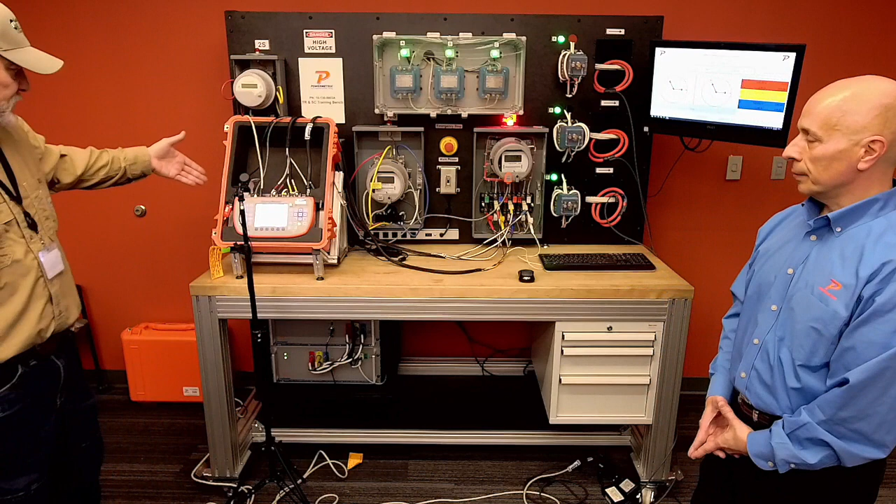Okay, so here's the 3 series right here. You'll notice, here's the dongle that allows us to communicate, and this is the window into PRM here. Notice we've added a little extension accessory right here, because the more we got thinking about it, you know how we tend to be the curve busters or the buzz kills, the field guys.

So this is all standard, everything's a standard connection. Stephen's going to, from his laptop over here, actually perform the test and everything. He'll be sitting over here at a table.

I'm not going to touch anything. I'll keep my hands in view so you know I'm not pulling any tricks. Stephen's going to start operating things over here. But we're going to talk about the screens a little bit over here. So I guess we'll head over here, right Steve?

Right, and we'll just continue, Jared, if you want to go to the next slide. Here's what we had from our phase 1 of PRM: the fact that this can be operated from 100 feet as well as in high EMF environments. It's now in a SQL Express database. We're Windows 10 and then in future 11 compliant. And these have been maintained now from phase 1.

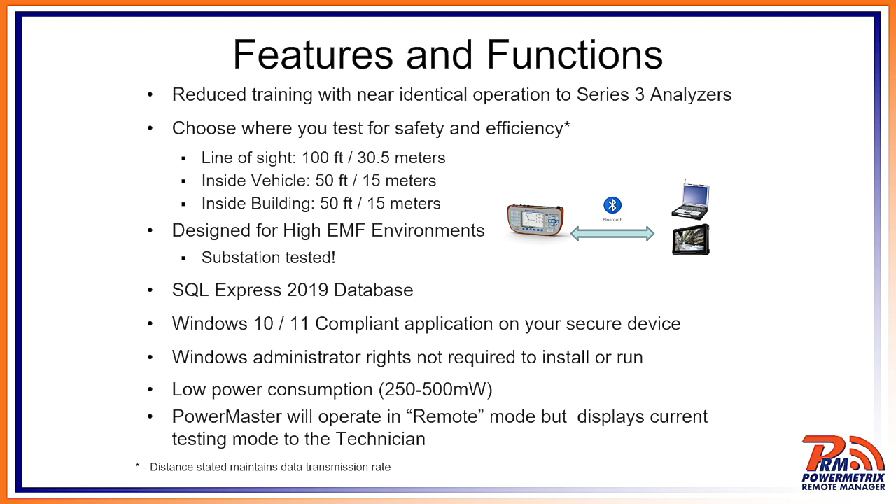And now into phase 2, what you'll be seeing today is we've updated the user interface. We have now real-time display of hot screen data.

So now right from PRM you can see hot screen data. We have the data being transferred in real time. We have a revised summary screen that you can save, as well as more data enhancements from a SQL database perspective, as well as the enhanced data selection capability.

And then, as John just said, the USB extender, that's part of the kit in addition to the Bluetooth dongle for our wireless communication. So with that, we can head right over to our tablet.

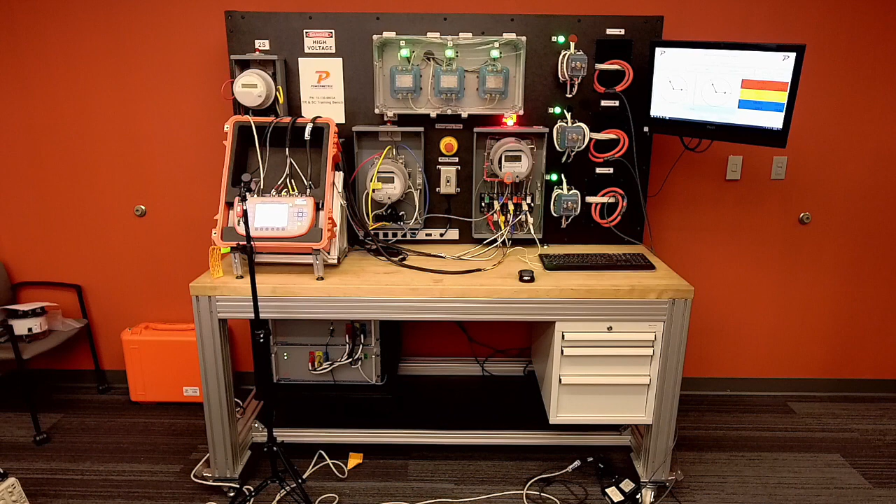So what I'm going to do right now is connect our analyzer, and I'll press the Connect Analyzer button. It will show the serial number of the 3 series that is there that John just showed us that's connected to the bench. So once it's connected, you'll notice the rest of these selections are now available for your use.

And one of the things that John likes to do is make sure that the test setup is correct and there aren't any pre-test kinds of signals or data that you could tell.

So as I mentioned before, we can now do our hot screen analysis directly from PRM in real time. Sorry to interrupt, Stephen, but when you were doing the Connect Analyzer, I noticed the number comes up, and that's the serial number off of the device, right?

So we know that you are married with this, so that we know which one we're controlling, and you can't have problems talking to different ones. That's correct. So you have to log in with that serial number of that particular device, so we make sure they're married together. We don't get any stray stuff, and there's no confusion.

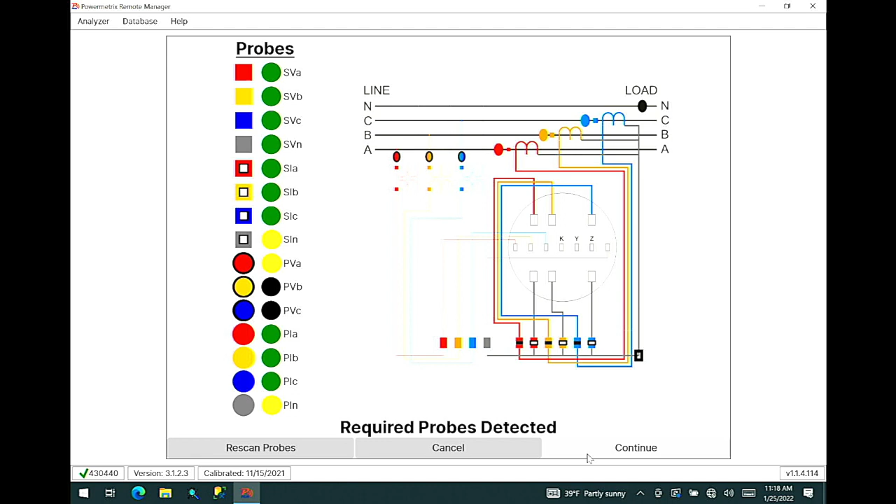So I'm going to run to the hot screen, or select the hot screen capability. It's going to do what we always do to make sure you have the proper probes connected. Probes were detected.

And now we're going to continue, where you'll see our vector diagram along with our ability — we have what looks like good vectors here — our ability to select primary and secondary current. And John, you can continue why that's important.

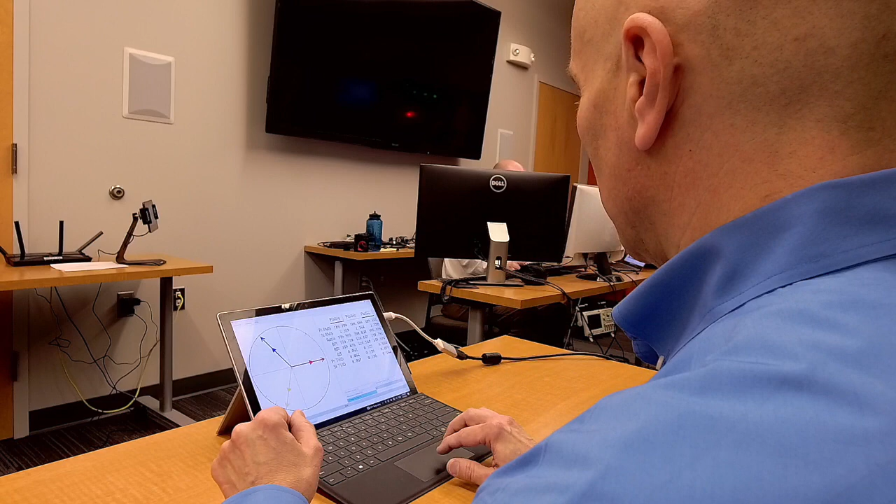So here you can see he has the selection over here on the primary. You have primary on this side and secondary on this side. So the primary over here, if Stephen clicks on there and drops it down, you can see I can take a look at my primary current or my secondary voltage here. If I come over here, then I can see my secondary current.

So what do we always talk about when we're doing these tests? We always talk about pre-test. I want to look at my primary versus my secondary current. And we have that capability now with the PRM, because you can see up here at the top that it changes from secondary current to primary current. It should, if you go to primary, right? Yes, let me just go down here.

Do you want primary? Yeah, let's go primary. See, so now we changed to primary current up here at the top.

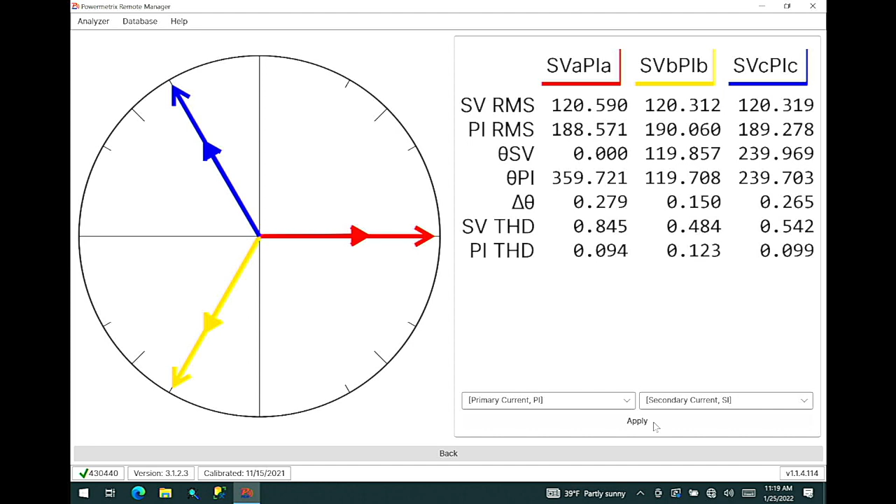It's the same function that we show on the webinars where I toggle using F4 on the machine. On the 3 series, you can use F4 and do the same thing and toggle the difference between primary and secondary current. And we've said how critical that is, not just comparing the difference between a CT being in backwards versus the secondary wires being swapped, but at that point you can capture anything.

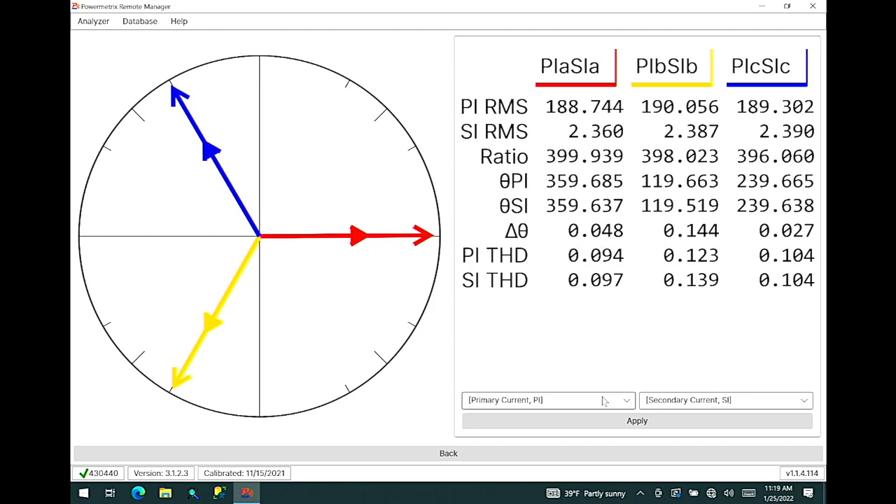Once you go into the test, you can't capture things. So when we've been out there with folks testing with them, we've seen a lot of harmonics that are unacceptable, or power factors we didn't like, and you can capture them in the pretest. So this is great that I can compare my primary to my secondary.

Another thing you can do with the PRM now, if you found in the field that you have a lot of corrosion, or in particular situations, you can't really do the test. There's so much corrosion there that our equipment doesn't have a good current path, but I can compare my primary and secondary currents, and knowing what my multiplier is, I can see if I'm close by just doing the math.

So if it's a 200 to 5, it's supposed to be 40 to 1, I can take my primary current, divide by 40, and look at my secondary, and I can see if I'm really close or way out. So all of that now is operational and functional with the PRM, because I can see primary and secondary. So that's good. Cool. And thanks, John.

So now this is before we start, so we have a good feel for what's going on at the site before we actually begin our test. And I'm going to select, this is just the standard test that comes with PRM. I will select that. You can put in your technician's name and or any comments about that site, which will be saved once the session is complete.

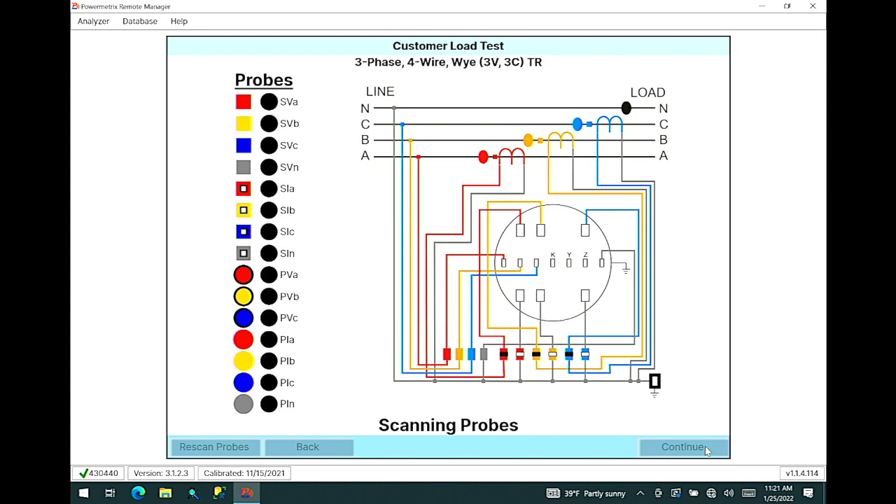Then we will go to our integrated site test selection, and I will choose some of the parameters there, since we do have double wrap CTs, and this will be a CT ratio test, I can then continue at this point. All of these, by the way, the great thing is these screens are looking very, very similar to what they see on the test kit.

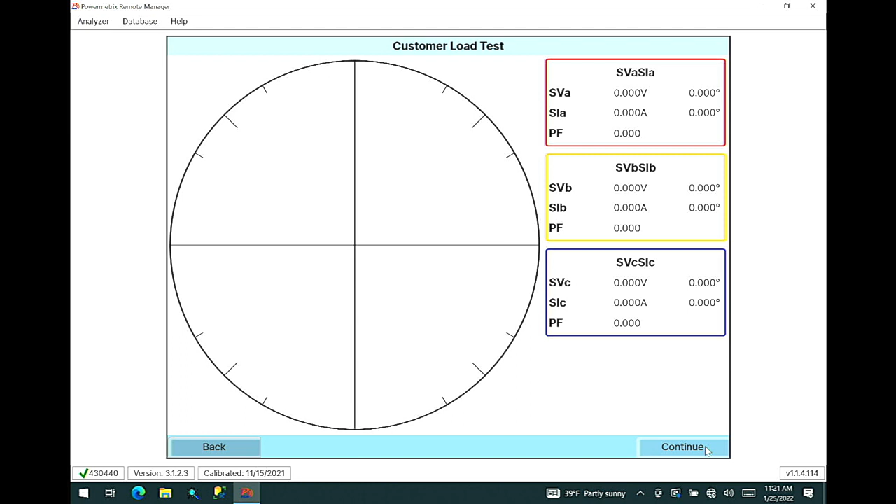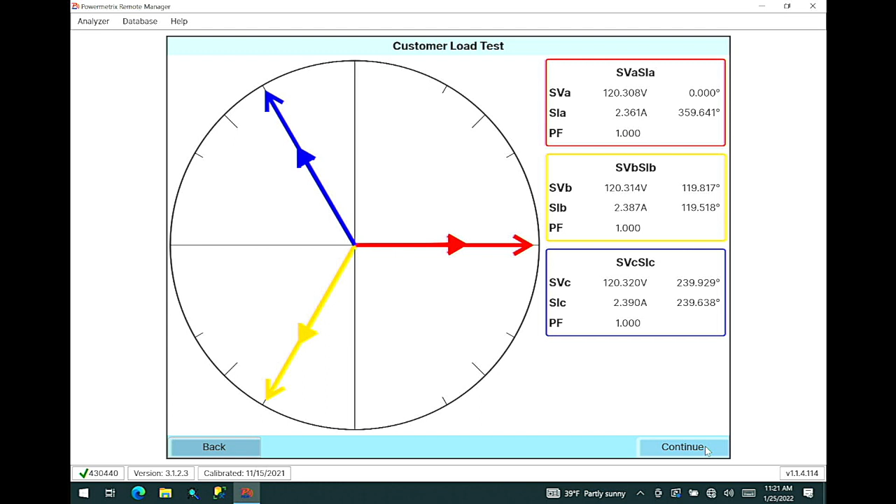So you haven't deviated much at all. It's not like they're seeing some crazy new screen. We've worked really hard to make sure that the workflow and behavior on PRM is very much identical to what's on the 3 series. We got good vectors here with each phase demonstrated in each one of the boxes.

And now we're going to go continue, where it will then check the valid signals to make sure it can continue on the test going forward. So again, test flow is something they're used to seeing. They're not seeing something different. This is the same thing it does when you run an integrated site test.

It shows you the vectors first on the secondary side, and it goes right into it. So it's not strange new stuff. Also, there's familiarity with this, so that's good. All right, so now, as it would on the 3 series, we'll go right into the registration test.

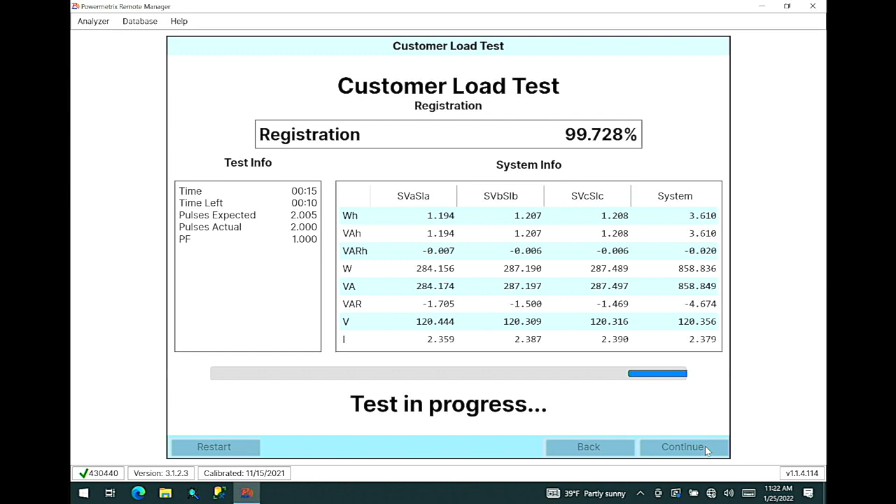And then once the necessary and valid signals are complete, it will then go into the current and phase test. And it won't let you progress until it says test complete and the continue button becomes active. So therefore, you know that all of the data is valid, yes. All of the signals are valid, and it then will enable you to continue.

Yes, just like with the test kit, when it runs it, it has to complete it all before it goes in, or it won't allow you to, the F6 button doesn't become engaged. Gotcha. And now we have our required probes were detected again.

And now it'll start to test each phase and the current of each phase and display those results. Again, just like we're used to seeing on the 3 series, it's going to go A, B, and C phases and do a CT ratio on each of the 3 phases.

And then the exciting part is once this is complete, our summary test fields, John, and the data will be available for us to save or then save and send. And that's always available until a new test is initiated. And I will go through that once the 3 phases and the currents are completed.

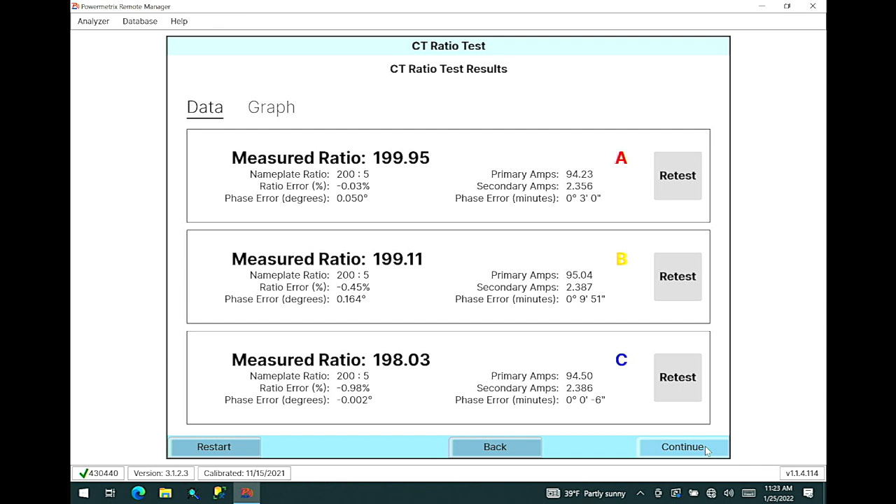And at any point, you can see there's a retest button. So you can individually test each phase, or you can restart the whole test at this point. So if you just wanted to ensure that what you're seeing is valid, or check connections, sure, or in any way rerun the test, that's available to you at any time. So again, just like they're used to running on the machine, they can test an individual phase, or they can retest all 3 of them.

So that's correct, we've kept the functionality the same. And then here is our summary screen that just demonstrates, with the parameters we've selected, what has been delivered from a data perspective.

Now, as you see, here are the selections. We could go back to that summary screen because we haven't initiated a new test. Now, what's really exciting about Phase 2 is our data and database functionality.

Just one quick thing. So here on the current session summary, that's when you've completed, so if you wouldn't mind clicking on it. So there you go. So here's where we see our vectors, our test results, and we see all that.

It was grayed out in the beginning because I hadn't run a test yet. So once I've run a test, now it's highlighted so I can click on it and use it at any time. And that's active and it's going to stay on that test results until I start to run another test. That's correct.

So in other words, the onus is on you, which you would want to do anyway, if you're the tester out there. Now what do I do with my test data? I can either send it, I can just save it, or I can put it into something. But I need to do something with it before I go to the next test.

That's correct. And just as a brief illustration, here's the save function. It's saved as a PDF, a portable document format. It will have the date and time. And then you can put it in any location, both locally or not, for that particular test summary of the test that you did.

So it's right there available. You could take that and send it, you can really do what you want with it, and that will be maintained. So if you wanted to have various ones of these with each test that you ran, you could do that as well as you change configurations or testing scenarios.

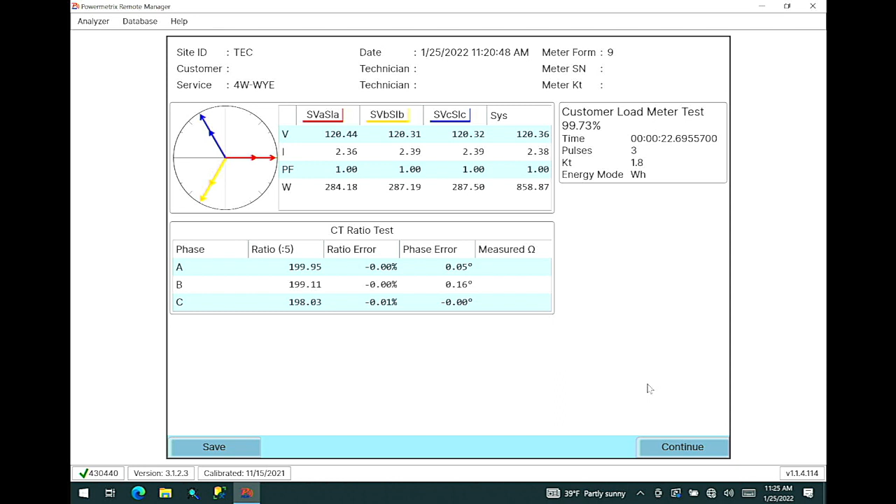So let's continue, and I will go up to the database section. What we've done here, and this is for Phase 2, is now you have the ability, and as I mentioned before, PRM will be your focal point for your test data, your test sites, your components, and everything about your testing capability. So you can import all of your meter site manager data, and it handles it automatically. It will then reside on your SQL Express database that is now part of PRM.

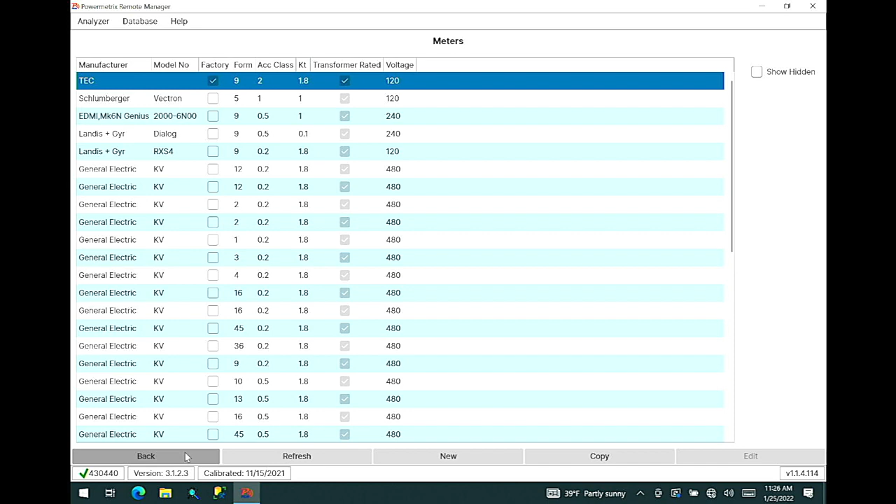In addition to that is the ability to manage sites and components that you imported using PRM. So we've updated our site selection, so you can go in and pick your various sites as we did. Here's our TEC site. You can also select meters that are now part of that, select the meters you have and or create or import meters that might be specific to that particular site, as well as PTs and CTs.

So you now have the ability to manage these individually right through PRM and create your own test setups as well. Each time you can go through and select which kind of test setup depending on the site that you're going to go to. In addition, phantom load setups are the same, and you can customize those as well. And then once the tests are complete, you can go and export that test data.

We will export those in .csv files. You can select them all if you'd like, and it'll select them all, or you can select the ones that are specific to you. So if you have compliance testing that requires a certain amount of fields, or customers that require fields they would like to see, you can just go forth and select those particular data fields that you would like.

Once you've done that, you can then save those, and they will be exported to a single file as a comma-separated value, which is a standard across whether it's programs or spreadsheets. And once you press save, you can put that in a particular spot that you'll be able to review later and or input into different programs.